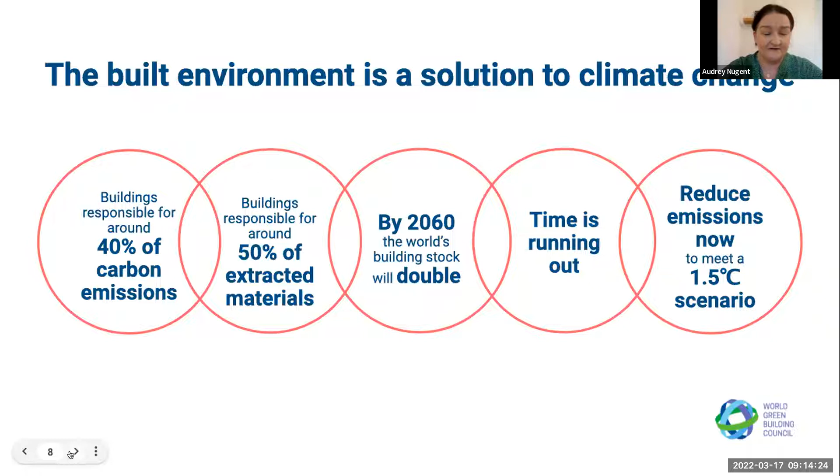On the one hand, we've got this challenge in terms of the impact of buildings. We know that the number of buildings is going to double by 2060. So we need to find solutions, and we need to be innovative, and we need to collaborate if we're going to reduce emissions to meet a 1.5 degrees scenario. So we just go to the next slide. And that's what we're trying to do at World GBC. We're really trying to raise the profile and elevate buildings as a climate solution.

Last year, ahead of COP26, which took place in Glasgow, we came together and collaborated with a range of organizations working in this space and united behind a common goal for a net zero resilient built environment in cities for everyone, everywhere. We were able to work with this coalition to elevate the profile of buildings at COP, and we were successful in securing a cities, regions and built environment day. If we just go to the next slide.

And why that was so important is because as part of the Paris Agreement, countries agreed to outline what are called nationally determined contributions, or NDCs. And what this coalition really focused on was ensuring that countries, and we're still doing this, it's a work in progress, would come to COP with building decarbonisation targets, concrete policies, and implementation mechanisms in their NDCs. And that's really important. If every country in the world really recognizes the potential of buildings in their NDCs, then we can see that number, that 40%, going down.

And we also were able to unite around a common goal that by 2030, the built environment will halve its emissions, and that by 2050, all new and existing building assets would be net zero across the whole life cycle. So that means looking at both the operational impact, but also the embodied impact.

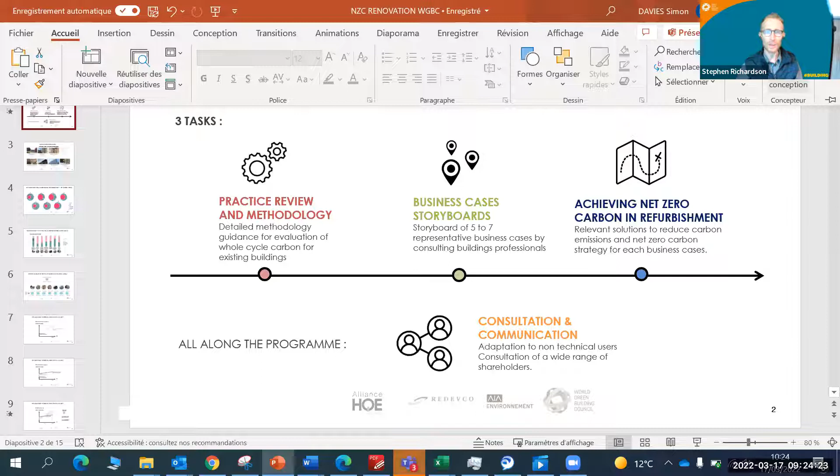So I see Simon's slides appearing. That's well timed. So Simon, I will hand over the floor to you. Please take us through the exciting results of this great project. Thank you very much, Stephen. I'm really thrilled to join you and present all the findings and perspectives from the Net Zero Carbon Renovation research program.

So maybe a quick overview of what the NZC renovation program is. We had three big tasks to do. First was a practice review and detailed methodology guidance for evaluation of whole life cycle carbon for existing buildings. Then we had to face the diversity of renovation. And our methodology was to identify storyboards of 7 representative business cases that we identified by consulting building professionals. I will show you those 7 business cases in just a minute.

And then an optimization phase. The target was to achieve net zero carbon in refurbishments and to identify relevant solutions to meet net zero carbon. And that's what I will present to you today. And of course, consultation and communication during the whole project.

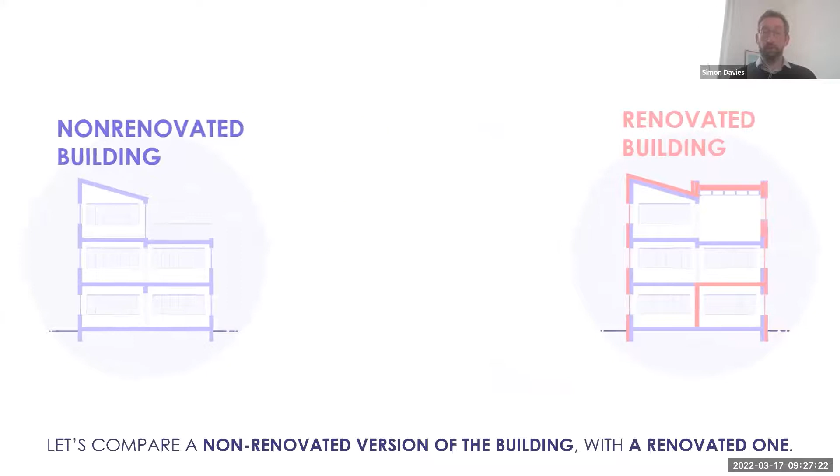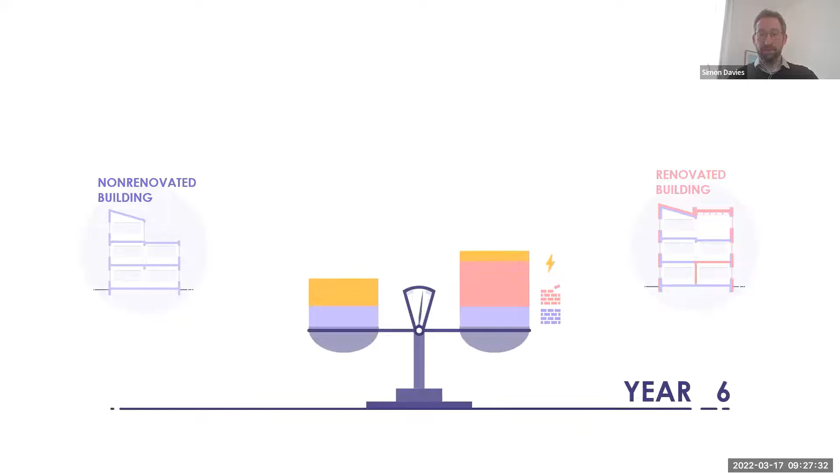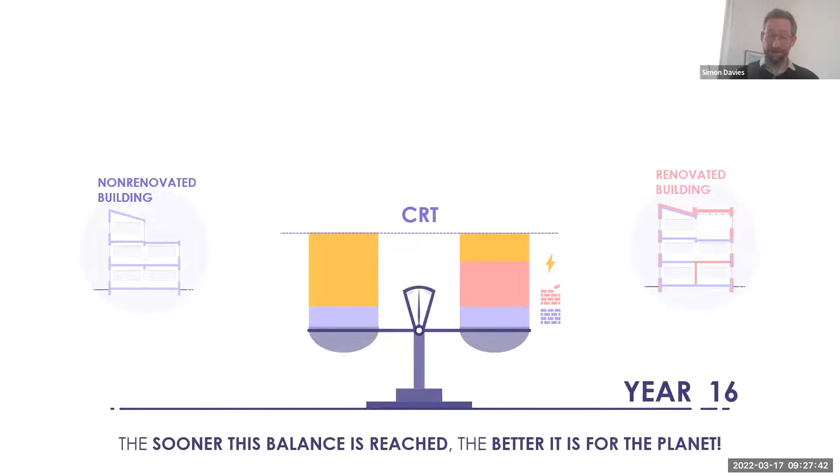And to do it, we compare a non-renovated building with a renovated building. And we add the initial carbon footprint, then the renovation carbon footprint, the embodied footprint. And then there are operational carbon emissions, and then a balance is reached. This balance is the CRT, the carbon return time, which is sometimes 10 years, sometimes 20 years. And of course, the lower it is, the better it is for the planet.

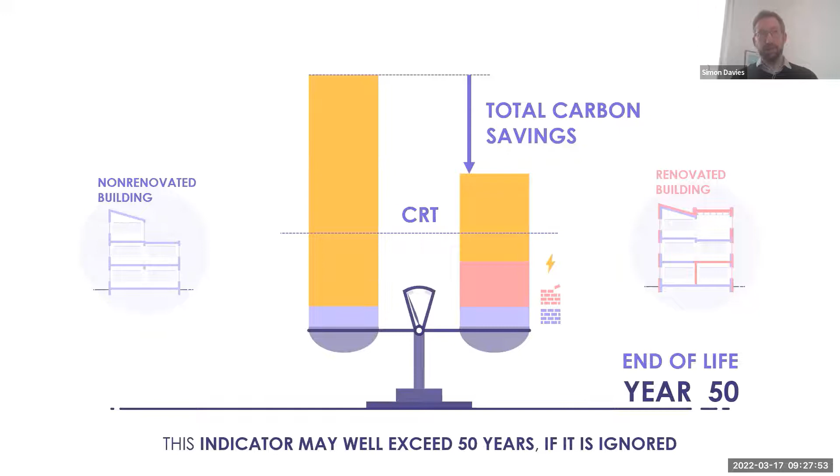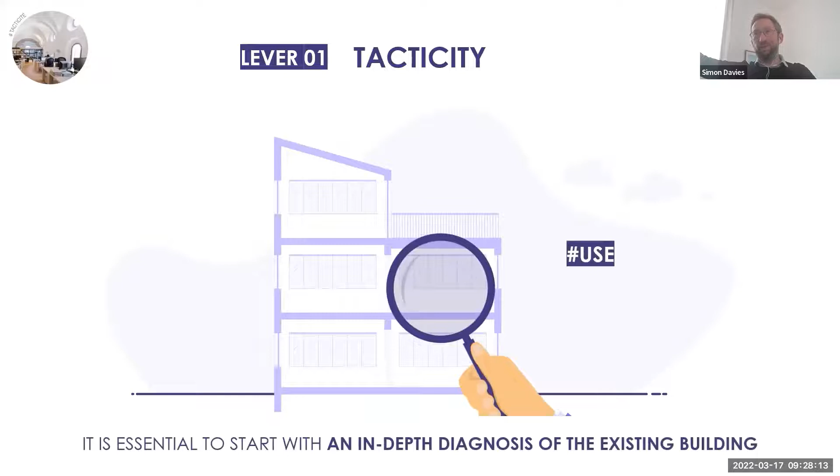So basically, the question is not, is a renovation low carbon, net zero carbon or not, but when will it be in time? And of course, we studied those 7 cases, and the answer was different each time. So basically, the NZC renovation program then identified 5 levers to lower this carbon return time. First one is tacticity, which deals with the diagnosis and the better effort-gain ratio during the program.

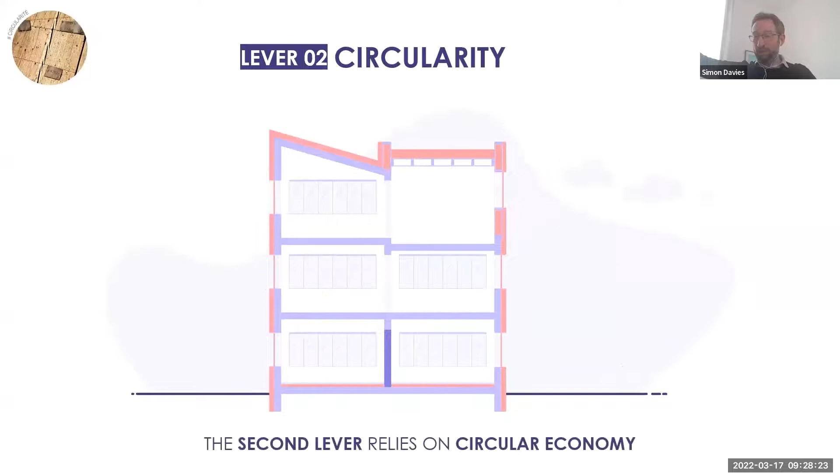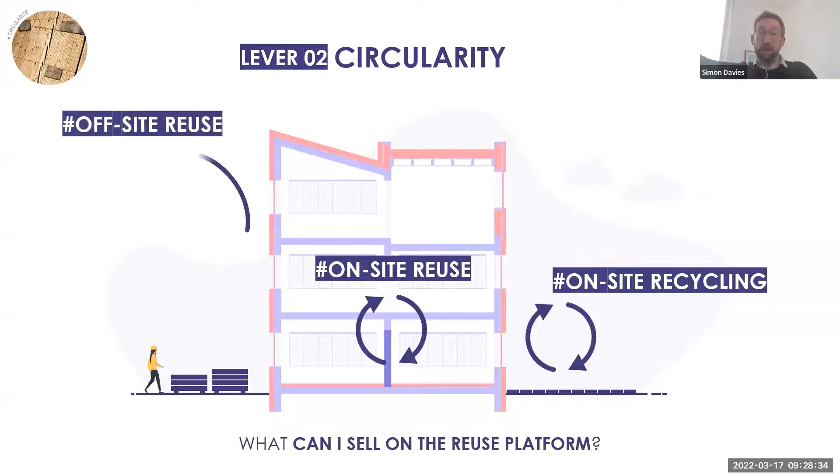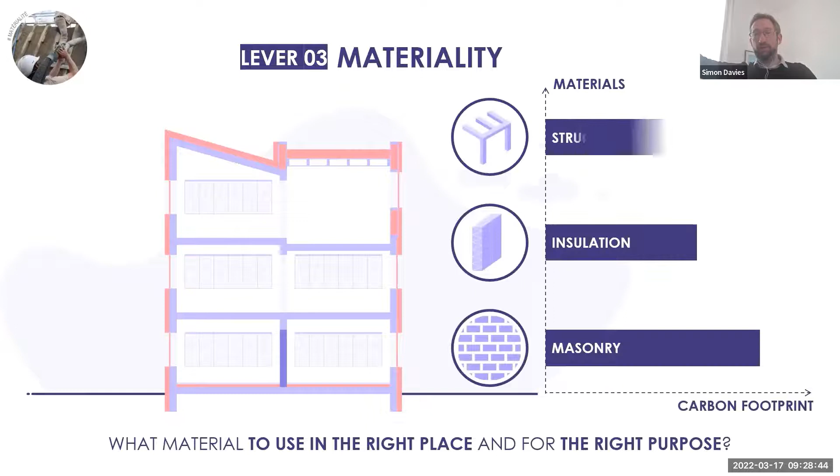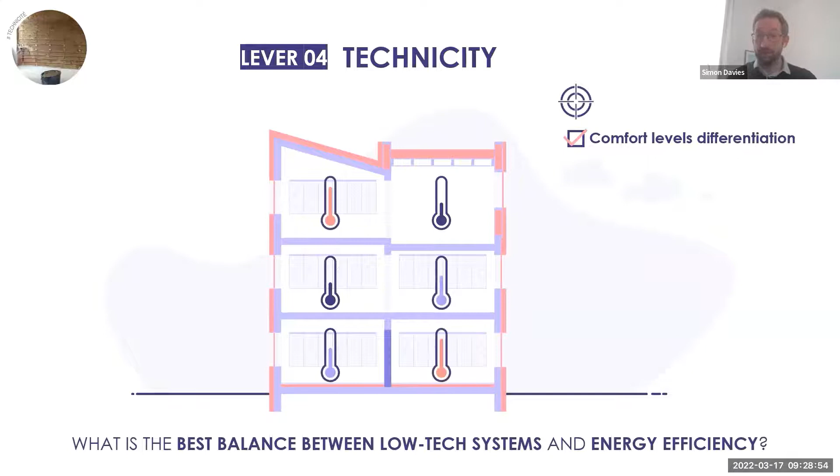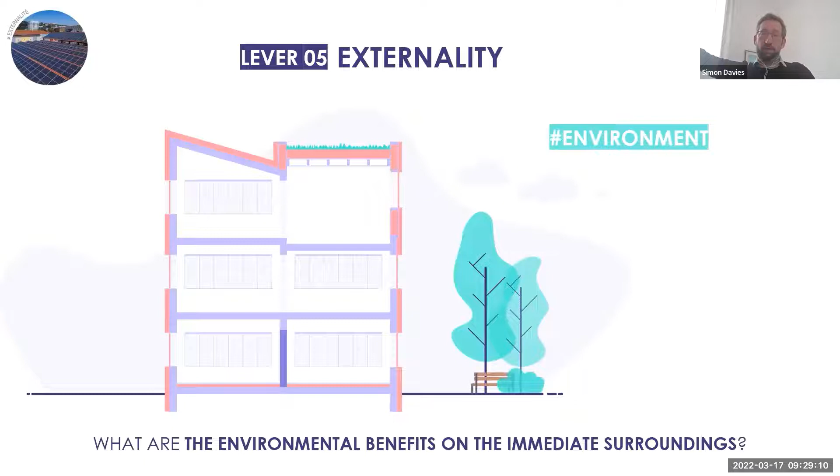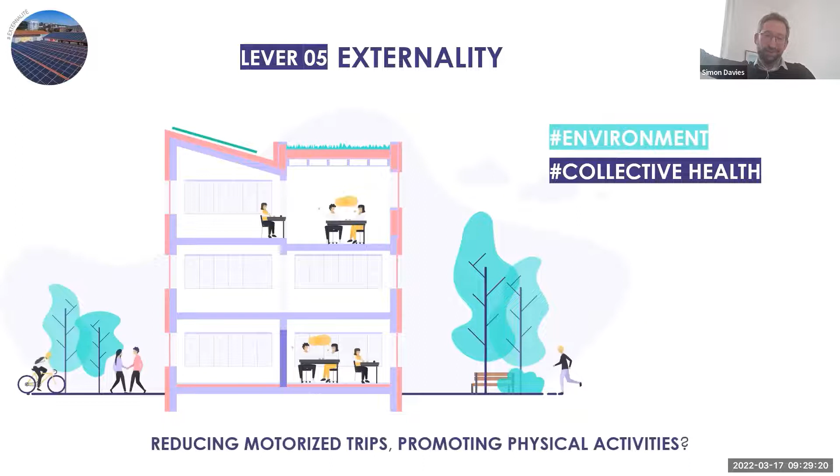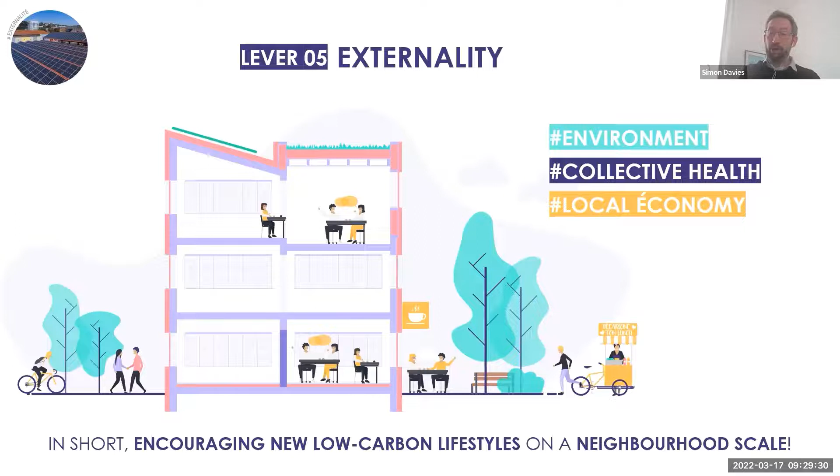And the last lever is externality. We consider the surroundings of the building and the close environment. And of course, you can have co-benefits for the environment, but also for collective health, if you consider, for instance, mobility. And of course, you can have a positive externality for the local economy. So basically, encouraging new low carbon lifestyles at the scale of the neighborhood is also a kind of positive externality. So basically, this is a sum up of the different findings of the program.

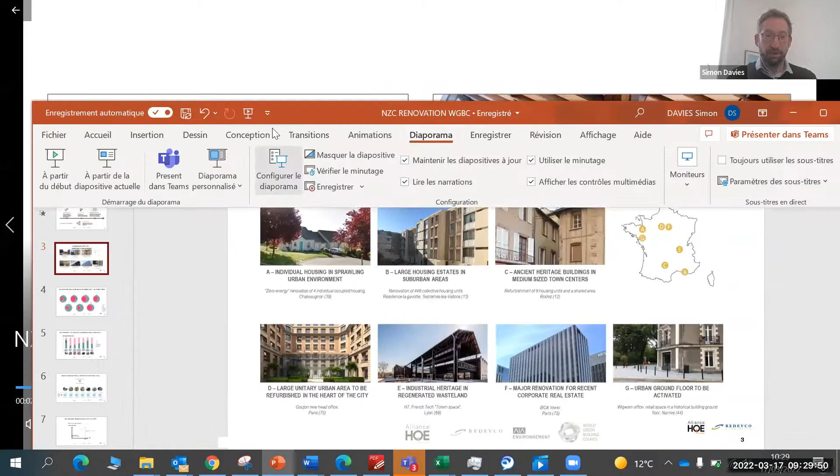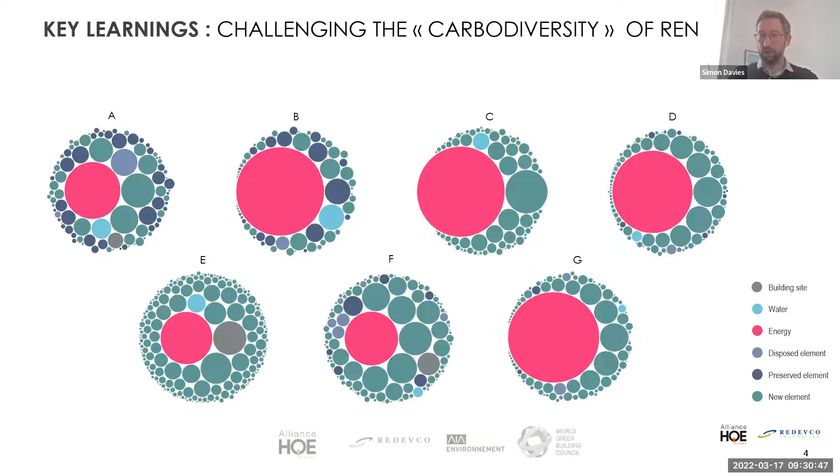And when we have this visualization, this representation, we can see that each building is really different. There is a great diversity of carbon footprints. And so we call it carbo diversity. This is one of the key findings. Each case is really different from one another, and we have to adapt all those levers in each case.

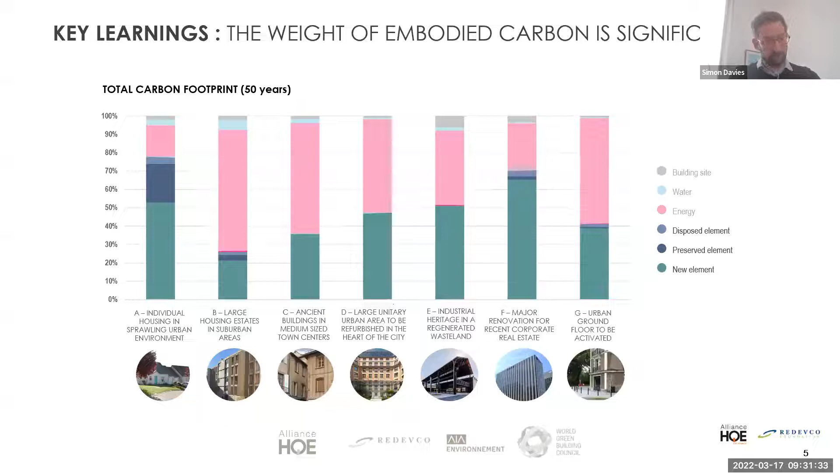Second finding, if we consider figures, is the fact that the embodied carbon part of the impact is pretty significant. First, we thought that as we are in a renovation context, we use less material, so the impact on the whole cycle would be lower. It is true, but it represents from 25% to 80% of the global LCA footprints, depending on how deep the renovation is and, of course, the function of the building. If you are in an activity building, an office, for instance, the footprint will be higher.

And then we studied 2 versions of the different business cases, and we calibrated them to see what was the building in agreement with the regulation versus a building that is really optimized with best practice. And using it, we can see that there is a great level of optimization for each of the scenarios, each of the business cases. This optimization goes from 40% to 60%.

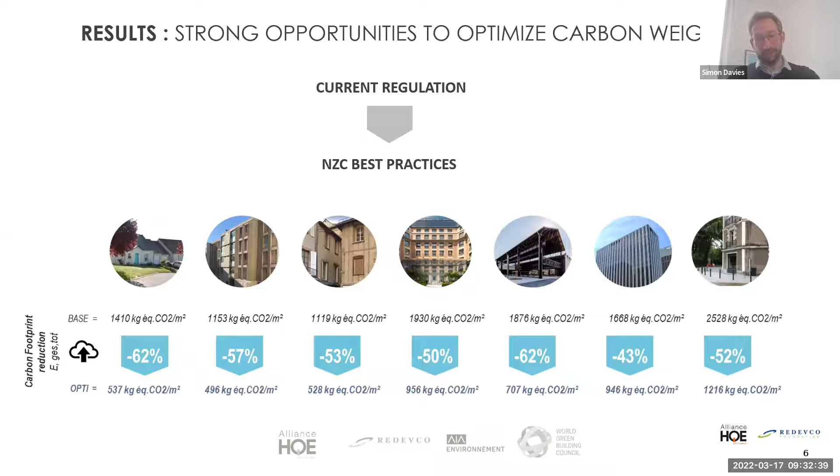So we must accelerate national regulation a lot, in France for instance, to integrate the carbon impact. Because using only the energy regulation to renovate, as you can see, there is a great gap to be filled with optimization. And so I just told you a bit about the carbon return time. There is another way of explaining it, considering cumulated CO2 emissions.

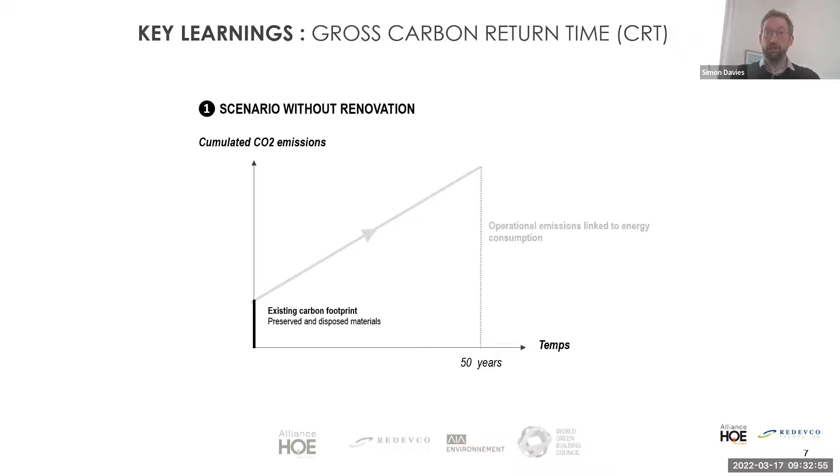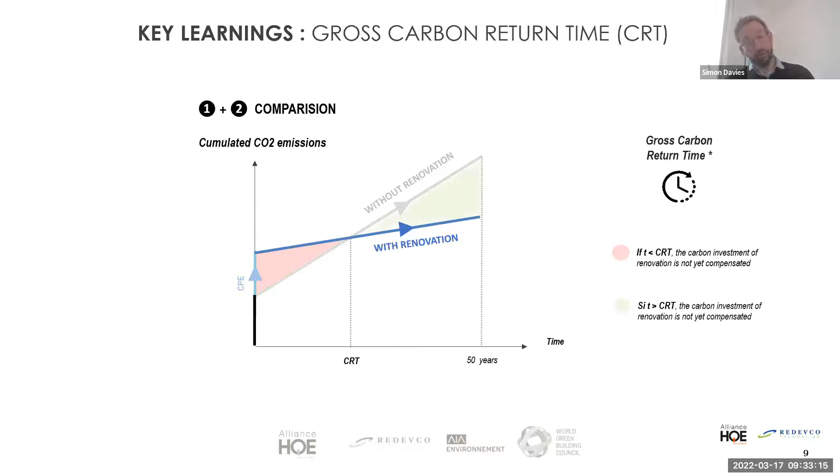Basically, if you have a scenario without renovation and a scenario with renovation, the two curves there will cross at a point, and this point is the gross carbon return time. Before this time, of course, the carbon investment of renovation is not yet compensated. And after this time, the carbon investment of renovation is compensated.

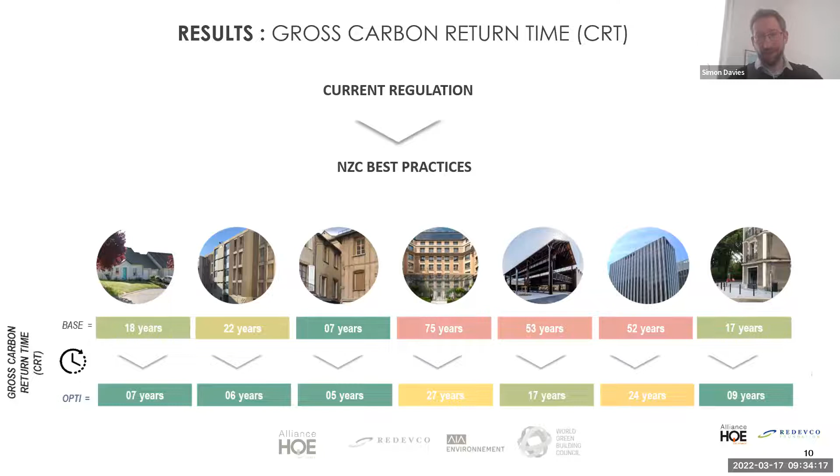So if we have a look at the results now for the different 7 families of projects, you can see that this gross carbon return time is pretty different from one scenario to another. It varies from around 75 years if you don't take into account optimization, to less than 10 years. So we think it's a really good indicator to take into consideration, because it means that in certain cases we will have to wait 75 years until the renovation is really useful to the planet, really useful to lower emissions. So it's quite interesting that this time approach maybe changes everything.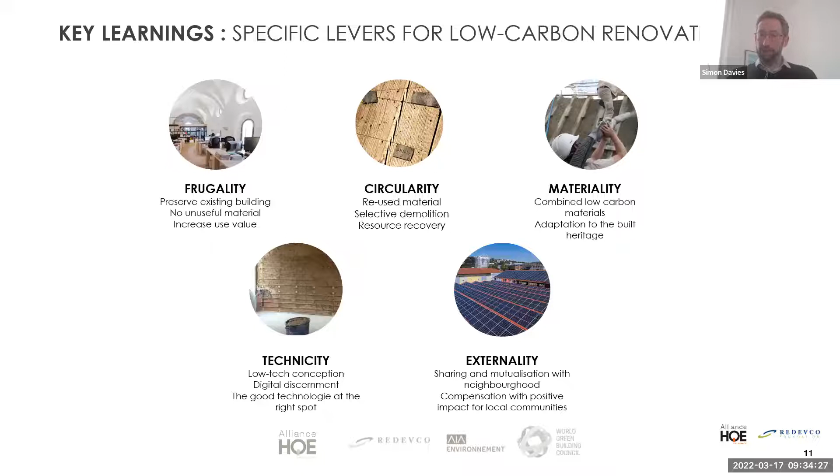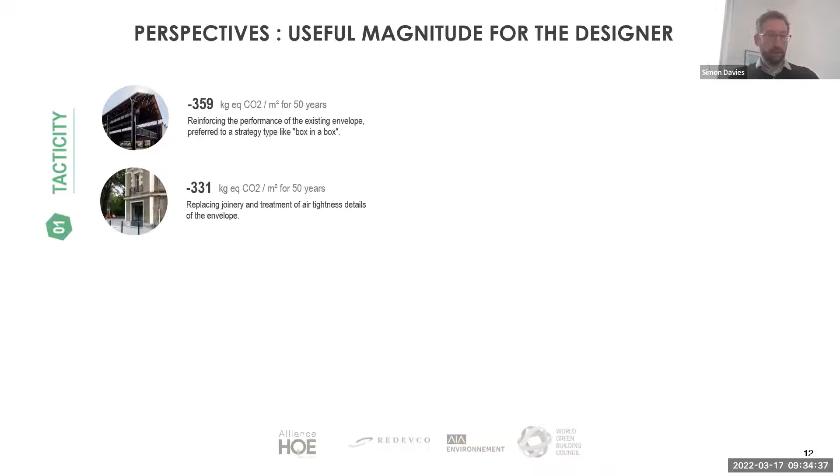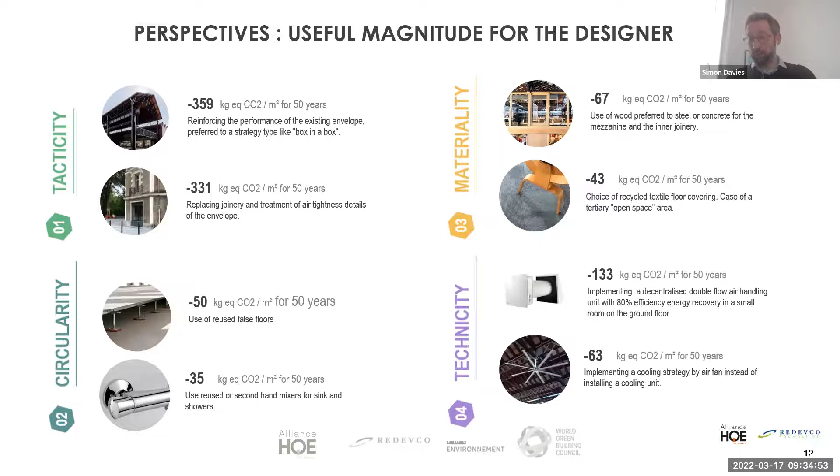I talked a bit about the different levers that I explained to you. What is interesting is that for each lever, we were able to identify magnitudes for different solutions. I think all those figures will help the designer integrate those strategies early in the project process. So you will have in these reports all those figures, and that will be really useful to optimize your project in the first place. Even if the LCA calculation is needed when you reach a certain detail in the project, you can have a good first assumption with those figures.

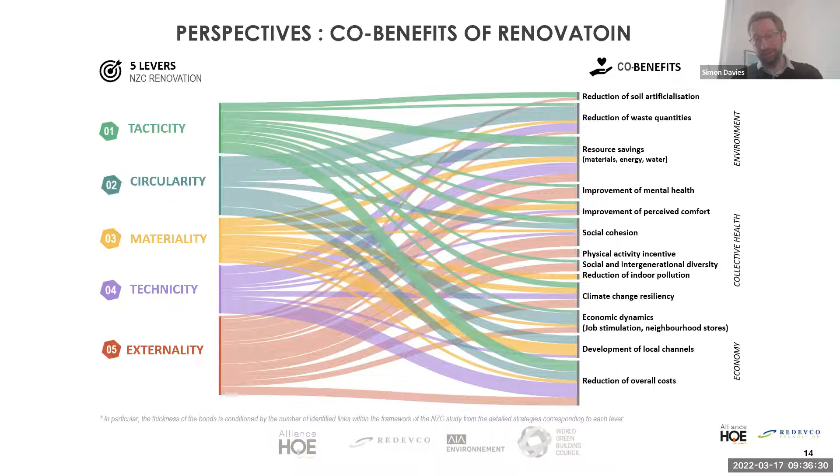And as Marjolaine told you before, we also identified the different co-benefits of those 5 levers for net zero carbon renovation: environment, collective health, and economy. As you can see in this really complicated diagram, there is a great interdependence between factors. So you have to consider not only energy, not only carbon footprint, but all those indicators, all those factors as a whole. This is global renovation. That must be the key to having co-benefits and, of course, reducing impact on the environment.

We will release in a few days an English version, because for the moment it's only in French, of 2 reports where you can find all the things I told you. First, a technical report: a life cycle analysis study and the NZC optimization of business cases. And another report, which is more graphic, more accessible for a non-technical reader: a booklet of low carbon levers in renovation, detailing all the different levers I told you about: tacticity, circularity, materiality, technicity, and externality. Okay, I hope I wasn't too long, but it was great sharing all those results with you.

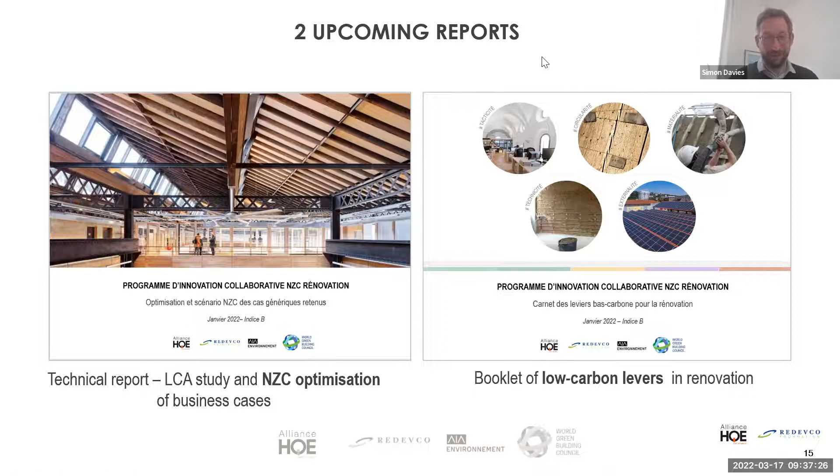Fantastic, Simon. Thank you so much. I see some questions already coming in, lots of interest in the technical details. So we'll be grilling you shortly on the detail of the project in a bit more depth. But before we come to that, it's a pleasure to welcome Ana Cunha from Deerns. Ana is our next speaker and is going to give us more of the industry perspective and reflect on some of the implications of this work for industry actors. So Ana, the floor is yours.

Thank you. Can you see my screen now? Not yet, not yet. Let me just, I'm trying to. Oh, here it goes. I think now you should be seeing it. Yes, we see it. Thank you, Ana. Over to you. Good.

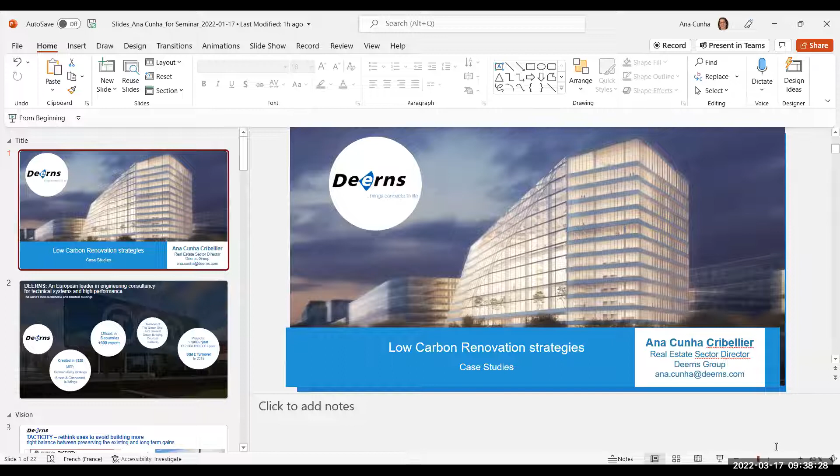So thank you, and thank you also, Simon, for the introduction, because my presentation will go through the challenges and fields that can be explored, also mentioned by Simon, giving examples outside of France, since the outcomes of the study are applicable beyond France, where the study was done. So indeed, when we want to do low carbon renovation, we need to look at different fields, at different elements, and I'll try to give a flavor with some case studies from renovation projects performed by Deerns. Deerns does mechanical, electrical, plumbing design, sustainability design, and smart building design.

So the goal is to show how actually these concepts that were mentioned before and outcomes of the study can really apply to all types of projects, and need to be integrated in a holistic approach to go beyond just LCA, but indeed look at the different fields and players that look and deal with the building.

One of the elements that Simon had mentioned was the tacticity. Indeed, it's important that we rethink the uses to avoid building more. Audrey's slide was saying that we are heading to actually have to double the number of buildings. So when we see the challenge of reducing carbon emissions, we really need to see how to intensify actually the use of these buildings and find a good balance between preserving the existing built environment and the long-term gains.

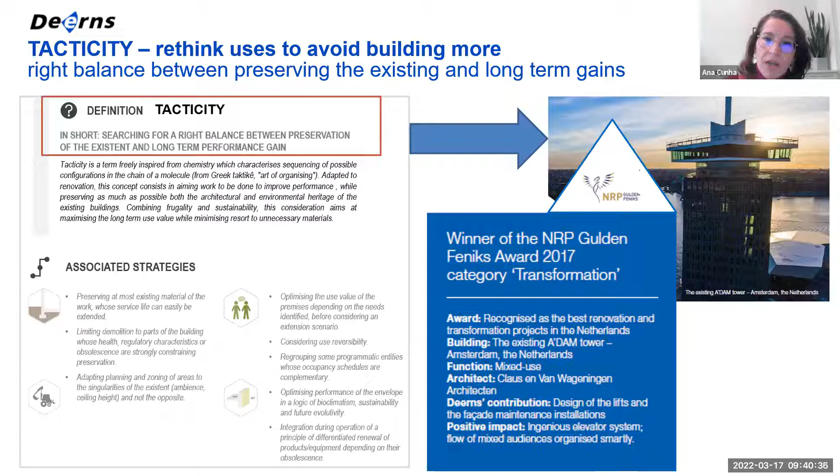And to illustrate how actually this challenge of the low carbon renovation deals with different specialties and considerations, I mentioned the case of A'DAM Tower, which was the winner of the Gulden Feniks Award for the transformation category. The A'DAM Tower that you see here in the screen was the old offices of Shell in Amsterdam, and actually it went through a renovation. We must know that prior to the renovation, the building had 4 lifts, conventional controls, and those 4 lifts were enough for an occupation of the 500 staff members that occupy the offices of the tower.

It was a single-use type of tower, and after the renovation, actually the aim was to make the tower multi-use, multi-function, and to actually be used on a daily basis by 3,000 to 5,000 people per day, which means multiplying by 6 to 10 times actually the previous use of the tower. It's not just enough to look at the life cycle assessment. When we want to be able to densify the occupation of a building, we need to look at installations. We must know that to move from one occupation of 500 people to 3,000 to 5,000, actually it would require at least 7 to 8 lifts in a building instead of 4.

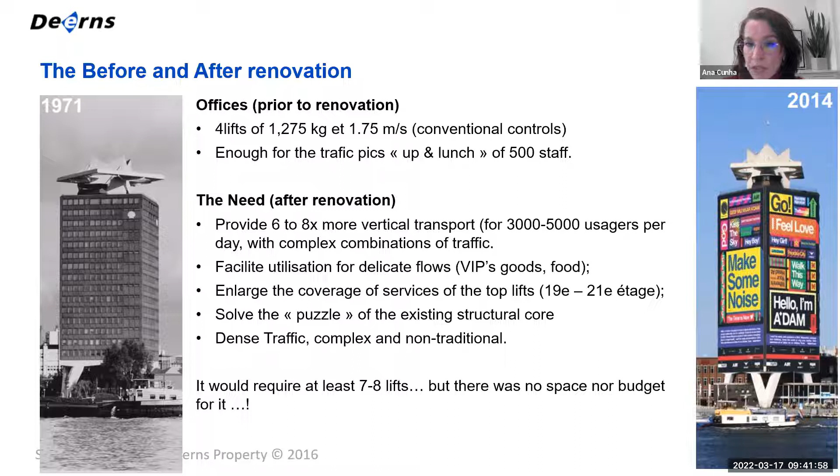You cannot easily change the core of a building. It's new materials, it's structural, it's more embodied carbon. And actually in this case, there was no space to add 4 or 5 lifts, nor budget for it. So this illustrates how actually when we are aiming to an intensification of use, optimization of the uses of the built environment, we need necessarily to look to other angles.

This image shows you how the building was. It was occupied by offices, 18 floors, and it became actually a building occupied by offices, residential, lofts, hotel, event, fitness, restaurants, and all that. So a multiplication of uses, bringing people to the building at different times of the day. And for this, we need to look at the design of the buildings, design of renovations from different angles, efficiency and organization and multi-criteria. We need to think of limiting the peaks of occupation and optimizing the logistics and processes for the benefit of design and use.

And a strong collaboration between engineering and architecture, because I think that the success of low carbon renovation relies really on these holistic and integrated design approaches. And intensification of use is not improvised. It needs to be addressed conveniently in early stages so that we can really make the best out of a building and optimize such renovation.

And in this case, it required early stage considerations of logistics, vertical transportation that actually allowed to make this transformation and only add 1 lift, limiting therefore the integration of new materials and equipments that, when we see Simon's presentation, these equipments, when it's about renovation, do weigh a lot in terms of embodied global impact.

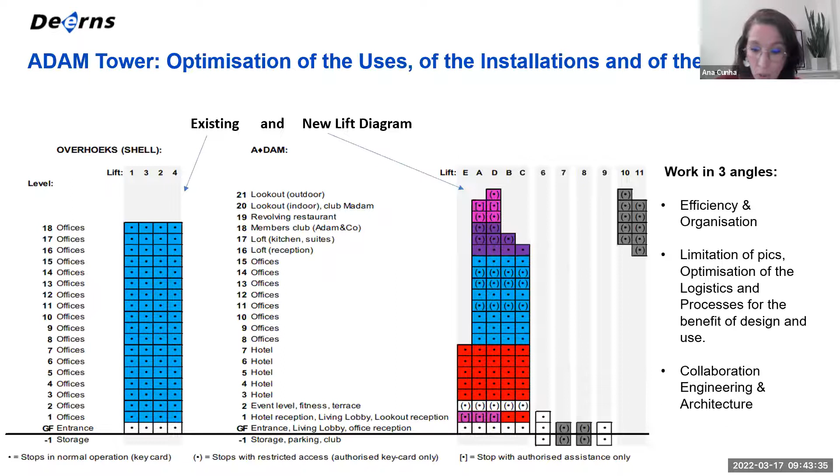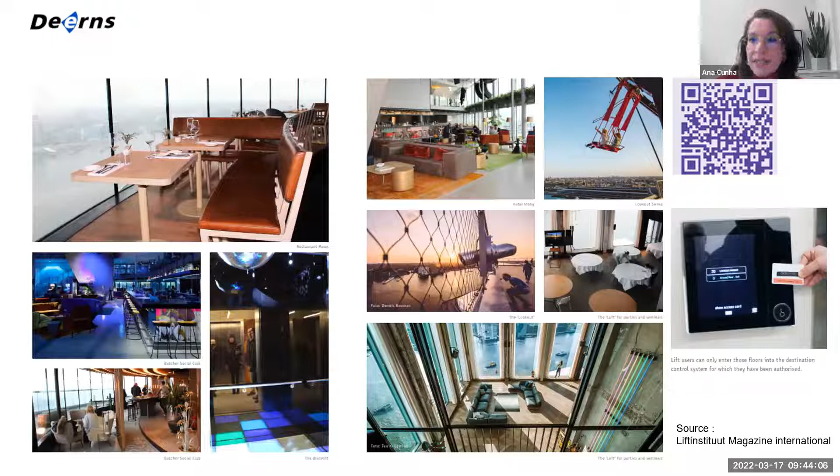So this is just to give a picture of what the tower became: a hub of uses, of interaction, renovated a part of the city and brought people in, and was intensified to finally become a building that multiplied by 10 its occupation on a daily basis. But this needs integration. It needs to optimize the whole materials, the whole equipments and solutions, and make early stages to understand the potential of such use intensity. It doesn't arrive at the end of the process.

One element that Simon mentioned was indeed the technicity. We need to find a way, when we're planning a renovation, for it to be low carbon, to choose smartly the technical systems. Although they optimize the operations part, they have an embodied impact that is not neglectable. So we need to choose smartly the technical systems and shall carefully avoid add-ons without a specific purpose. We need to see how less is more, how less materials, less equipments do more in terms of functionality.

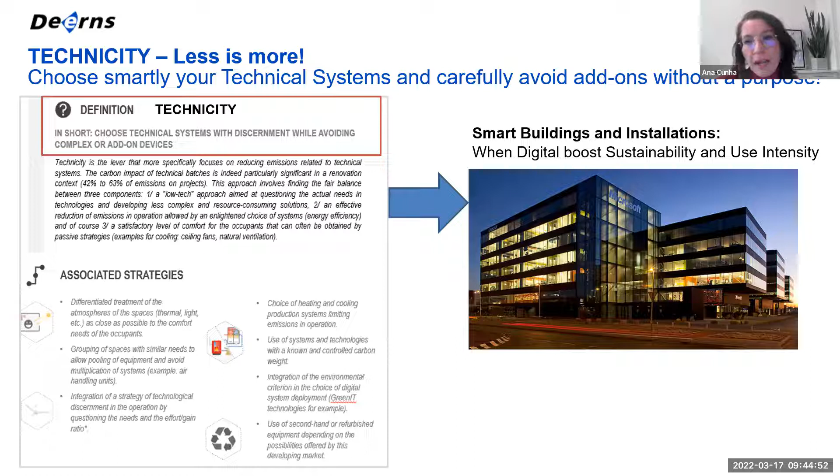And that's why I give the example of one of the buildings of Deerns, the Microsoft headquarter, Outlook. It shows how digital can help support sustainability and use intensity. Because in this building, which was an old building, the client decided to renew. And I think the interesting part of this is to bear in mind that we need to challenge and change the way we design buildings. We need to bring innovation, but we need to approach the data and information available to us to optimize the design of the buildings.

In this case, the building prior to renovation was occupied by Microsoft: 11,500 square meters were occupied by the tenant, Microsoft, for 700 employees. When we approached this, we actually started the other way around. Usually we look at technology for the user experience that you'll get at the end. In this case, a smart infrastructure was put into the building temporarily to sense what happens inside, to understand the real use, where people were. Do they occupy meeting places by 3 or by 10 people? What are the zones they prefer to work in, and conditions, temperature, and all that.

And after this data gathering, this initial stage, the information was used to confirm the real needs in terms of space, occupation, and comfort. And this information was used in the renovation design. So this shows how we can have a data-driven design to have optimized scenarios and an optimized renovation. And indeed, this renovation allowed transforming this office into a service, the office as a service concept, and even adapting the business model between the tenant and the landlord.

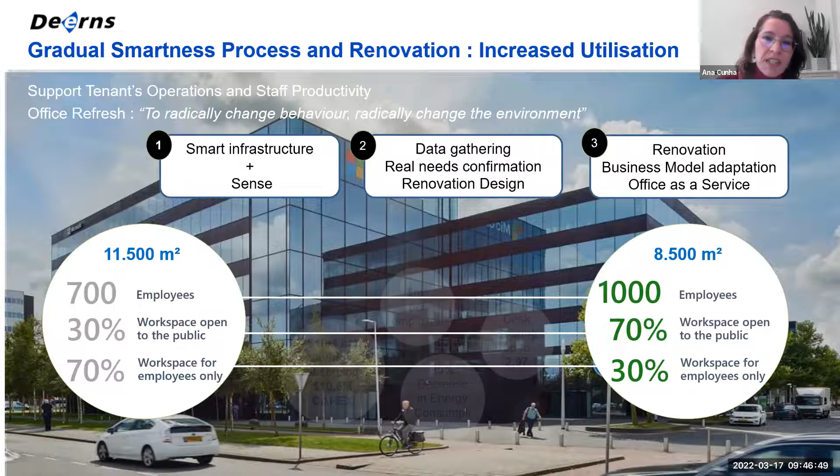Because after renovation, Microsoft used less space, they leased only 8,500, so 30% less, but they put almost 50% more people inside, which shows that this renovation was about improving the energy efficiency of the building, whose consumption decreased by 85%, but also intensifying the use: less space, but more flexibility, more functionality, so that we can do more in less space. And the savings generated by leasing less space and saving resources and energy covered the capex needed for this renovation, knowing that the remaining 3,000 were occupied by another tenant.

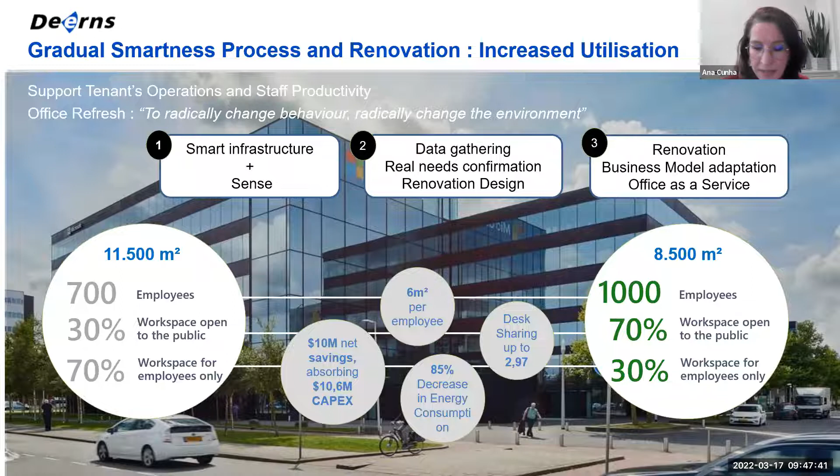So everybody was happy in the process, and it shows how we can think smartly, the good combination of digital and sustainability to achieve improved performance, use intensity, functionality and healthier spaces for users. Because in this case, not only did we have to renew the building in terms of resources, we had to define with the tenant and the landlord the pathway, the experience, what we wanted to see happening in the building, and how the technical infrastructure should respond to that, being able to evolve without having to be changed regularly,

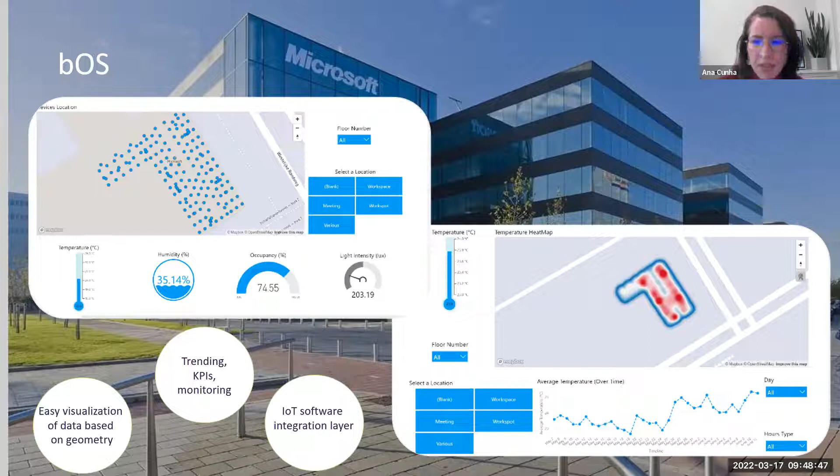which would represent an even bigger carbon impact over time. And we must not forget that digital smart devices do have an embodied impact, and we need to select them smartly so that the carbon return time Simon mentioned in his presentation doesn't keep increasing, instead of being reduced so the carbon return happens fast. And this is just an example of how, by transforming it to be sustainable and using data-driven models, it was possible to monitor in real time what happens in the building, its use, optimize resource consumption, and even automate the extraction of information for ESG purposes.

It served the tenant, but it also served the landlord, who, by doing this in one building, was able to connect the different buildings they had nearby, to propose space as demand evolves, and finally connect synergies between buildings, allowing tenants to evolve in terms of occupation and creating added value for everybody with a strong logic of renovation. So it's important to reduce the carbon impact. It's important to focus on service to be able to use more and better, and to see technology as a tool, not as a goal in itself, a tool to intensify the use. Shall we have less space? Okay, but let's be able to provide more services, more flexibility without having to change often.

The next step, also mentioned, was circularity and materiality. It's important to have the right material at the right place. How can we incorporate an ambitious circular economy strategy every time we touch a project, and how can the waste of some be the resources of others?

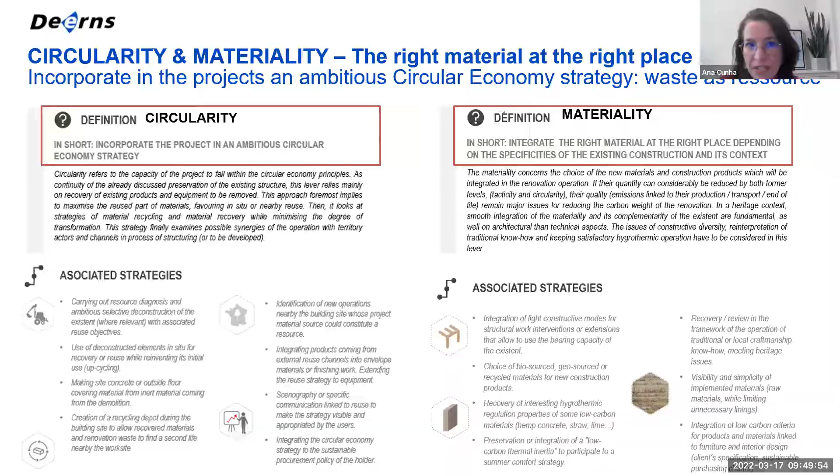And for this, I give the example of one of our projects, BioPartner 5. It is an office and life science laboratory. It's the first energy neutral lab in the Netherlands. So it shows how the operations part of this building was strongly worked to minimize the energy demand, to be able to produce it on site, but also how the circular strategy came from the beginning of the project, reusing and selecting the best materials.

Actually, 165 tons of steel were used in this building, reused from a building that was being demolished nearby, to build a new structure that was transformed near the construction site. Former slate steps were also used as toilet tiles in the building. Glass office walls that you see in the images once served in a governmental building nearby too. Rubble-filled gabions that form a low-tech green facade were also produced for this building, and old KPMG toilets have been given a new life in the project.

So this shows how it's important to see the waste of other buildings as resources for our own, to also work on embodied carbon reduction. For this specific project, the circular strategy allowed us to reduce 40% of the embodied carbon linked to construction materials, including the choice of lower impact solar panels that produce the energy here. So it allowed us to save more than 200 tons of CO2 with this project.

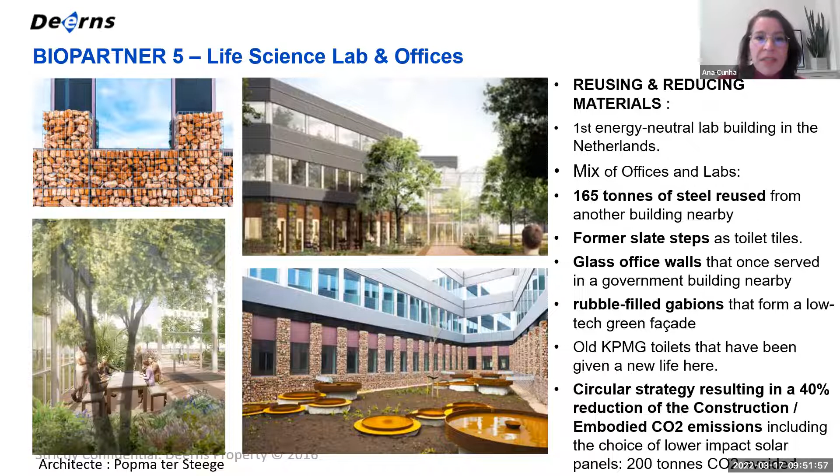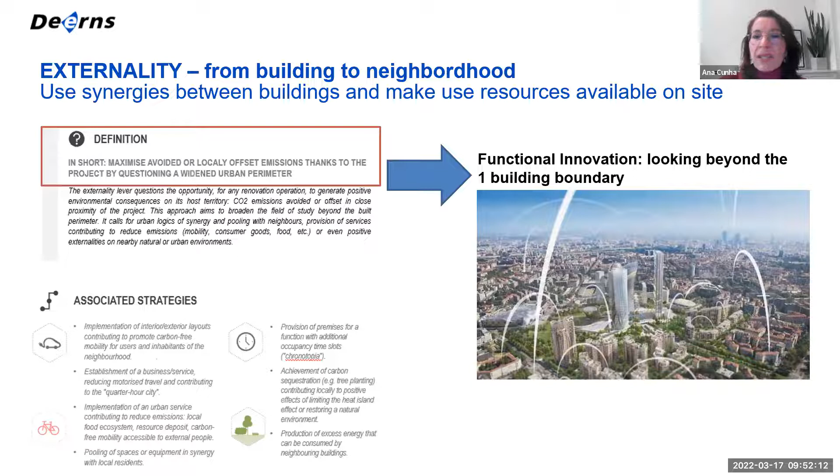And finally, I would mention the externalities that Simon mentioned. We need to think beyond the perimeter of one building alone. We need to think of synergies between buildings and always think of making use of resources available on site. It's about functional innovation. Here I give some examples of buildings you may know, others less.

When we designed Bosco Verticale, it was designed to be an icon of biodiversity and sustainability, but the energy strategy uses an aquifer integrated in an energy center that is not building by building, but was done for the neighborhood to feed in heat and cooling. And the water of the system is used for the irrigation of the building. So this shows how we can think low carbon and biodiversity, and think of mutual energy centers instead of building per building, because it also allows us to reduce the number of equipments and share them between buildings.

Edge Olympic is an example of renovation too. It's the little brother of the Edge, the headquarters of Deloitte, which we also designed. This renovation integrated an ATES, aquifer thermal energy storage, with a data-driven operation. In terms of circular strategy, the renovation also uses elements from the previous facade that are now finished flooring. We need to think multi-criteria, because the LCA alone won't do the whole transformation.

New Time is an example of use of these nearby resources too. It's a renovation of an office building that decided to use the river water in Paris for cooling and heating, reducing the energy demand of the building by more than 50% just with that solution.

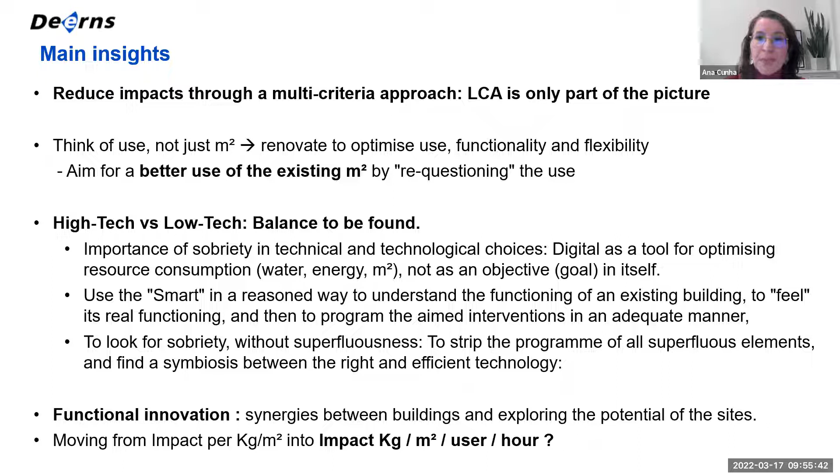And this makes us think that indeed we need to move from impact per square meter, kilogram of impact per square meter, but to also integrate other elements like per user or per hour if we are aiming to intensify the occupation and use of these buildings so that the use is also improved in terms of reduction of carbon.

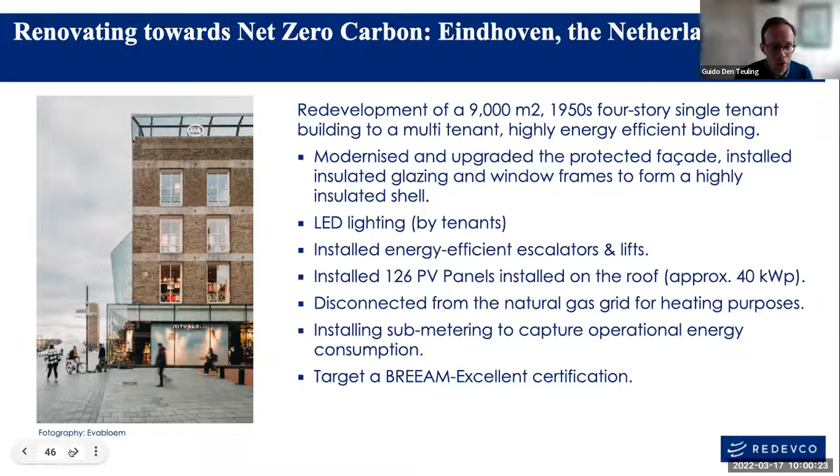So a few challenges that we actually face when we work towards net zero carbon. I think one of the main challenges that we have, or maybe also one of the opportunities, is we have existing buildings. And with existing buildings, there are often limitations on what is technically possible, both with the building itself and also the location they're in.

Usually we have a retail setting. A retail setting is different from an office setting in that we as a landlord control the building envelope, whereas the tenant is in control of all the services. So there's a bit of a split incentive there to upgrade that. So we have no control over what kind of lighting, we have no control over what kind of installations are there, but we can try to work together to see if we can actually come to solutions that benefit both.

We have a lot of inner city locations. Often that means limited roof space for solar photovoltaics, but also a lot of overshadowing of buildings, and lots of services that are on the roof could also prevent us from putting solar PV on the roofs. Geothermal is not always possible. You can't always drill in the soil to find the right layers and to have enough space to actually take account of that. And there's also obviously a potential noise issue from equipment that you install on the site.

One other thing that was for us something new and something that we are trying to tackle and work on is looking at outcomes-based target setting. So we use CRREM pathways as guidance. They're EU-wide targets, and I think they are at the moment the best and most up-to-date targets, showing us where we need to be within the 1.5 degree scenario in 2050. But it does require very knowledgeable and involved partners, because you have to look at design all the way through to operation, and also a different mindset.

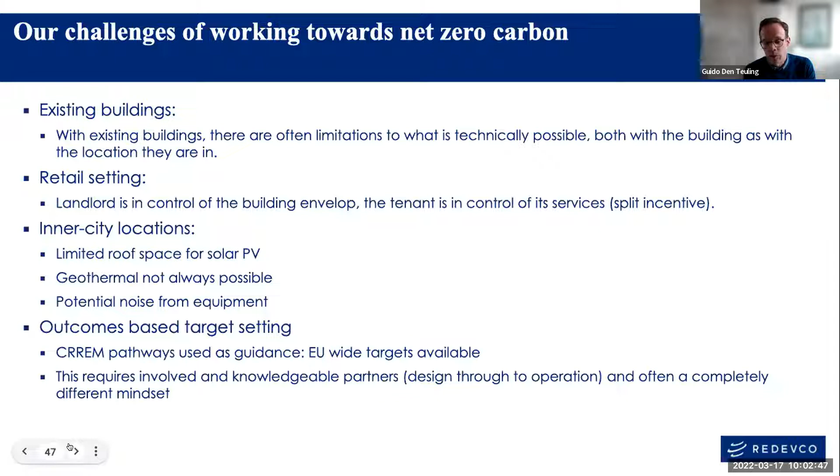So a bit into disconnecting from the natural gas grid. Obviously, if you want to get to a net zero carbon building in operation, you really have to make sure that you have a highly energy efficient building. So that's what we tackled with going to a very highly energy efficient shell. But we also say that we don't want any combustion of fossil fuels to generate heat or hot water. As I said, traditionally, and this is specifically in the Netherlands, that is through natural gas. And in Eindhoven, we disconnected that.

That meant also that we had to talk to the network operator or the grid operator for electricity, because we are going to have a much higher demand for electrical power in an all-electric building than if we would just have the natural gas connection still. So we really had to make sure that whatever we wanted to do was able to be delivered, which fortunately was the case, but also making sure that the network could actually handle it.

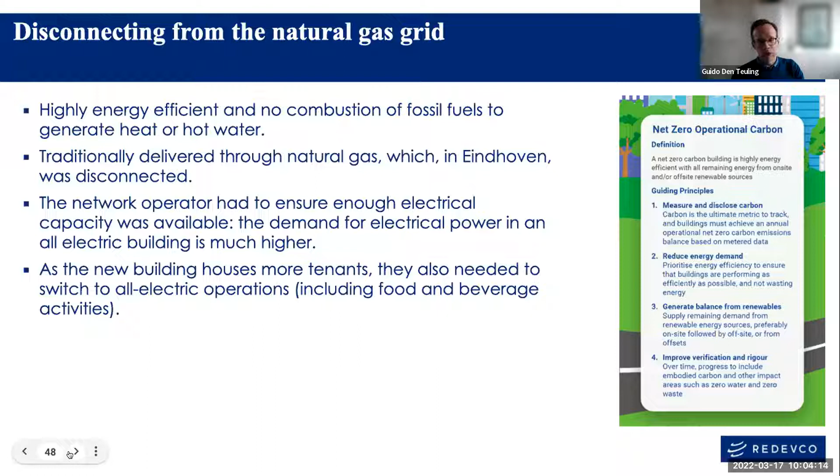The other thing that we looked at, we go into a multi-tenant building, so we need to really talk to our tenants and make them understand that they need to go to all-electric operations. One of the challenges that we did have is that we went from a fashion retailer to also retailers that have food and beverage activities. And food and beverage, obviously, you're looking at kitchens, and with kitchens you're quite often looking at natural gas connections. So here we also had to talk and make sure that our tenants were on board and could help us with that.

So it brings us to the next slide, where we're looking at the importance of tenant engagement. So as I said before, when you look at retail settings, a landlord is in control of the building envelope and the tenant is in control of its services.

So that creates that split incentive we talked about. So disconnecting the building from natural gas was a bit of a different thinking. We had food and beverage activities that we had to take into account. So we had to really work closely with the tenant to make sure that they understood what was actually involved.

So obviously tenant engagement is always going on, but we really wanted to start that very early on, before you actually sign any lease agreements, and you also want to talk about it throughout the whole project, to make sure that what's being installed and what's going on is actually working. We did challenge them as well, to say you have to go to all-electric solutions, as well as to improve the energy efficiency.

And as a result, we got the food and beverage using all-electric kitchen facilities, which was for them in some cases quite new, and full LED lighting by the tenants, which surprisingly is not always the case in retail settings, more and more, but not always. And we also installed the all-electric heat pumps, energy efficient lifts, and also the escalators in the building, to make sure that we go all electric. Next slide.

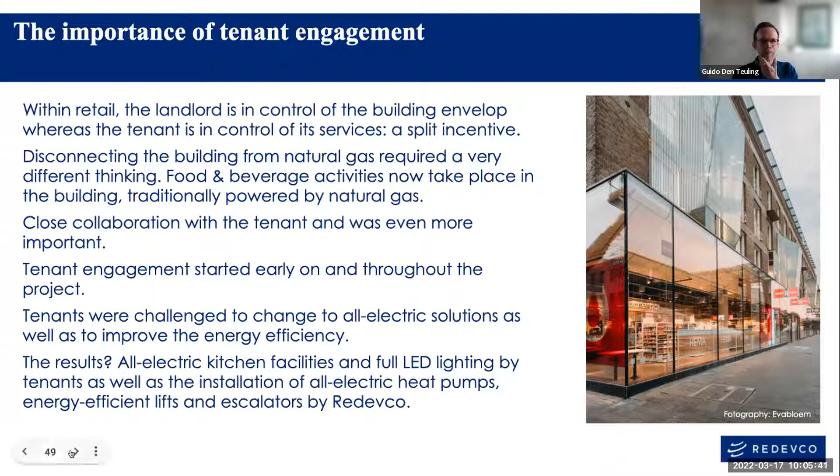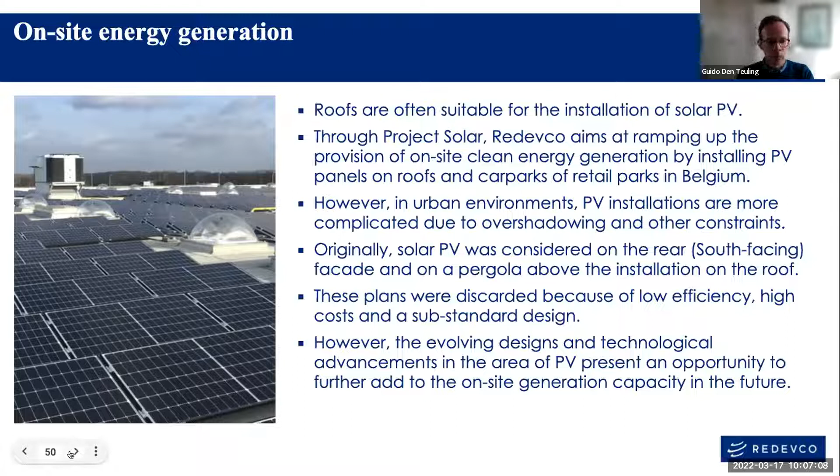So rather than only looking at operational carbon, we're now also looking at embodied carbon. And this is that different mindset that I talked about earlier. We also start specifying low carbon materials. You can do that by saying we want bio-based materials and hybrid solutions, but specifying low carbon materials also comes from setting the right targets. If you start targeting a maximum of kilograms or tons of emissions per square meter when you do redevelopments, low carbon materials will come out as a preferred element.

And we started to use design and construction methodologies in line with cradle to cradle and circularity principles. Cradle to cradle we've used in a retail park in Belgium, where we also looked at how we can take the building apart after its useful life, using design for disassembly thinking. And we also started using less concrete in that building, looking at wood and steel constructions that we can repurpose at the end of life.